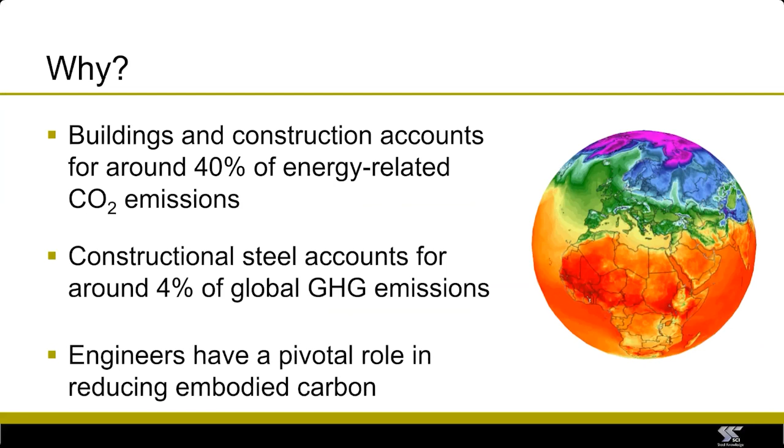Ladies and gentlemen, my name is David Brown, and I'm speaking to you about the critical responsibility that structural engineers and designers have to minimize embodied carbon. And the reason for that responsibility is blindingly clear. Construction accounts for a significant part of our greenhouse gas emissions, and within construction, clearly steel and concrete are both important. Therefore, as designers, we have a responsibility towards the planet and towards future generations.

I'm sure most people will be aware of the target to limit the rise in global temperatures to 1.5 degrees C. Well, it's already anticipated that that target will be exceeded. So the challenge is not to stay below 1.5 degrees C, but actually to minimize the overshoot. And we do that by decarbonising.

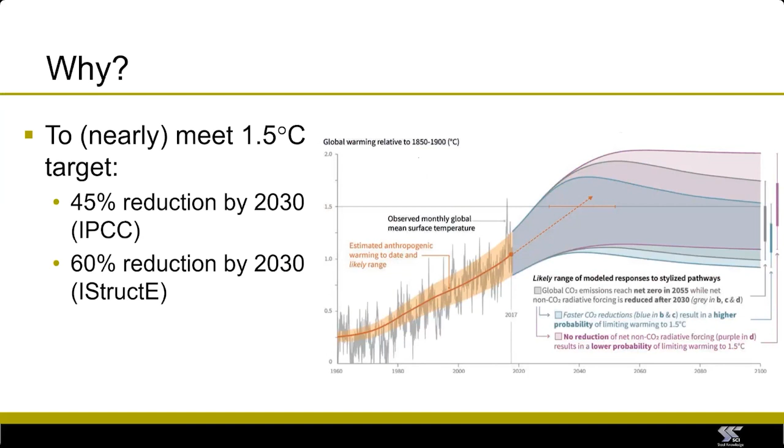So in all aspects of life, we're being asked to decarbonize. In construction, we might think about the embodied carbon and the operational carbon. Over the years, the total has reduced, but the proportion allocated to embodied carbon or embodied energy is increasing, because we've done things about the operational energy. We've got better levels of insulation, more efficient heating, and we're concerned more about air tightness. So even though the whole life situation has reduced, the proportion allocated to embodied energy and embodied carbon becomes a more significant contribution, and that's why it's the target to reduce embodied carbon.

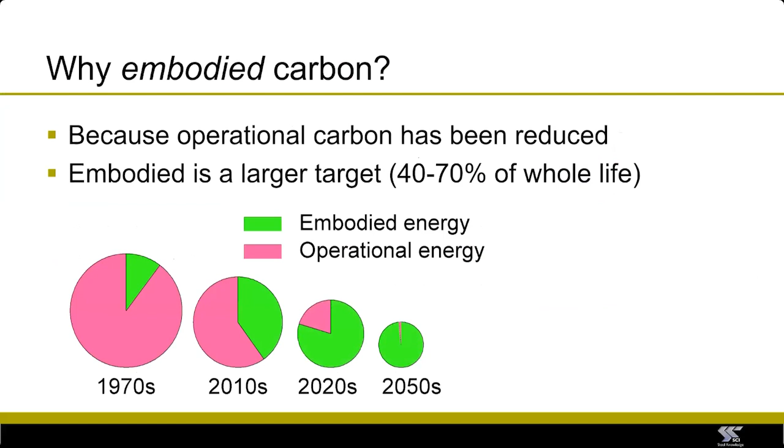So, like very many industries, the steelwork industry has a roadmap to decarbonize. In this case, it's to decarbonize by 2050. Many of these steps are the responsibility of the steel manufacturers. So recently we will have heard news from British Steel and from Tata about their plans to change their furnaces into electric arc furnaces, which run on scrap, and that has lower embodied carbon.

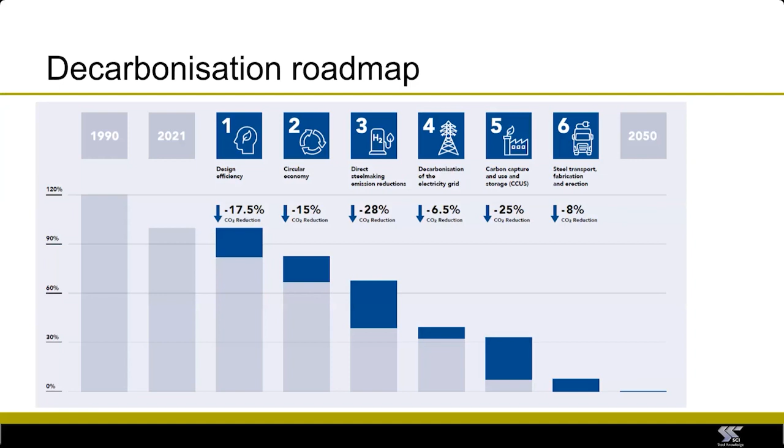So many designers, of course, are tempted to specify steel from the electric arc furnace route. That has the advantage of making your particular project look good, but it hasn't solved the global problem, because the global demand for steel outstrips the volume which can be produced by the electric arc furnace by a factor of 2. So although your project might look good, it's simply shifted the problem to somewhere else in the globe. What we really must do is just use less steel in our case.

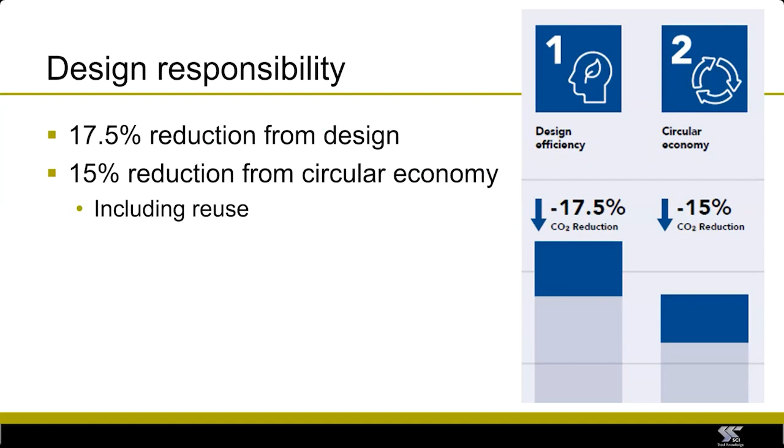So there are a number of steps which are allocated to the designer and the specifier, and here they are. I think there are significant opportunities to reduce embodied carbon by design. These are not particularly difficult, they're not particularly new, but they can have a very significant impact. And it's those things that I'm going to talk about in the rest of this presentation.

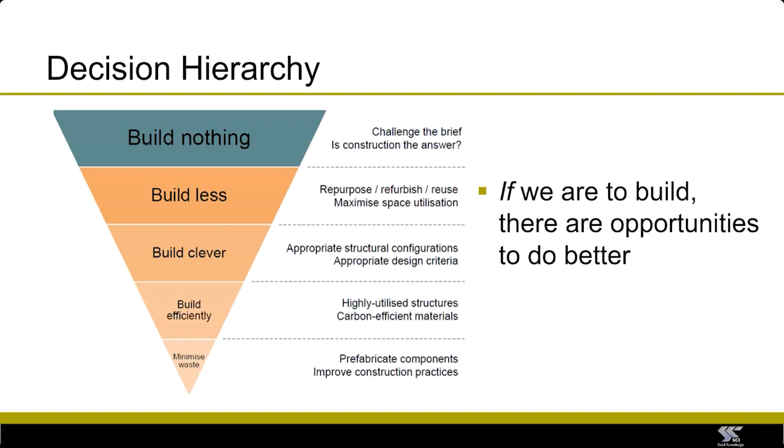If we've decided that we do have to construct something, then there are a number of questions to be answered. And as we go down this triangle, the opportunity to reduce carbon is rather minimized, so the ones towards the top should be our priority. I think in all of these areas, designers must have a response. It's no longer something that we can just simply pay lip service to. We must be able to address these challenges and explain why we have or why we haven't chosen a solution with minimal embodied carbon.

So a number of these issues then, and I'm sure you'll be familiar with many of them. The first one is we shouldn't over-specify the variable action. And the normal variable action that we deal with, particularly in multi-story buildings, would be office loading. And yet very many people will not choose the value which is specified in the UK National Annex of 2.5 kilonewtons a square metre, but they will actually choose 4 plus 1.

4, which represents crowd loading, and 1, which is an allocation for movable partitions. And the reason for that might be that they are allowing for future change of use. But that means that they are allowing for an unpredictable future, an uncertain future, which of course may not happen. And that means that somebody's paying for that allocation in capital cost, but they're also paying for it in an environmental cost. And we need to be sure that we really do need 5 kilonewtons a square metre.

Research has shown that over half of designers choose a higher load than the load which is required according to the United Kingdom National Annex. Of course, if you do reduce 5 kilonewtons a square metre to 2.5 kilonewtons per square metre, that has an effect on the eventual design loads. It reduces them by about 30%. So that's really significant, and that will be throughout the building, and that will find its way into the foundations.

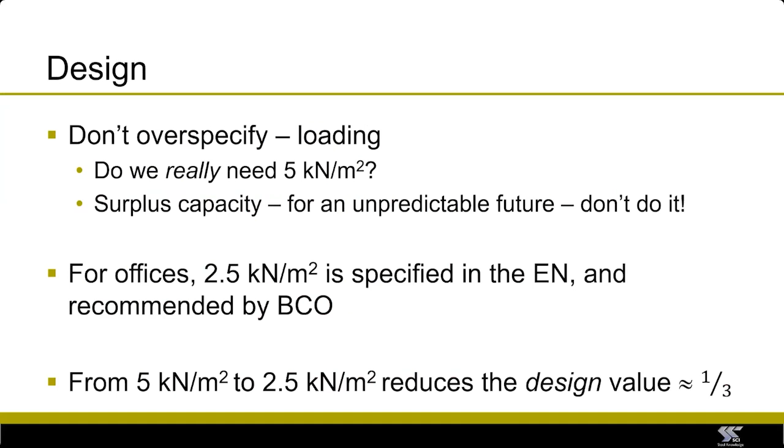When we're thinking about loading, we should use the reduction factors. There is one reduction factor for area. There is a second reduction factor, which is really very useful, and that reduces the axial load in lower columns. It's really significant - if there are more than 10 stories, the reduction factor is 50%. So the axial load in the lower lengths of columns is only half what it would otherwise be. That means we can choose smaller columns, less weight, more lettable floor area, less carbon. That must be an advantage, and we would be derelict if we didn't pay attention to these reduction factors.

Second thing about loading is that in the United Kingdom, we have the option of calculating the loads in accordance with expression 6.10, or the more onerous of 6.10a and 6.10b. We should always be using that second option. It's not really any more work at all. Expression 6.10b is pretty much always the more onerous of the two, so we kind of know it's already going to be that one. You might say it only saves a little bit, maybe about 3%, but every little saving leads to an overall saving, and this again would be throughout the entire structure.

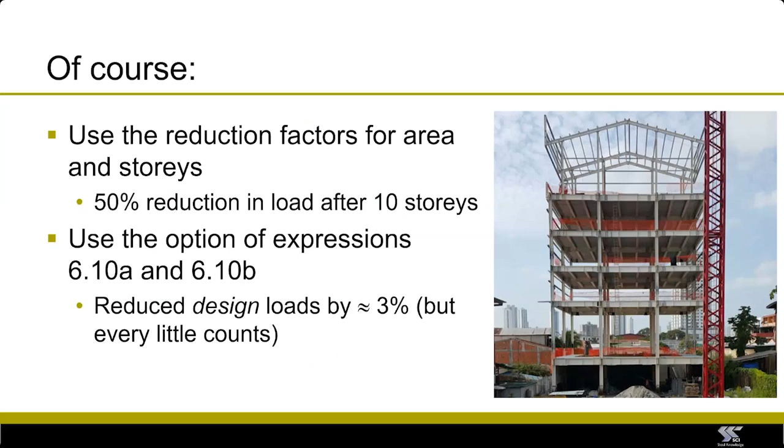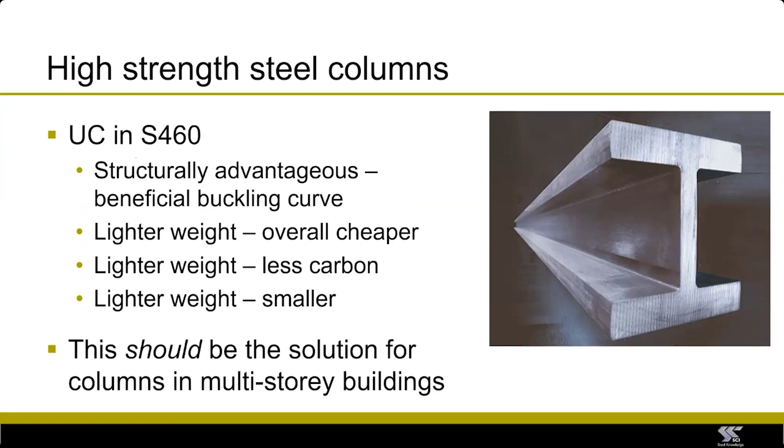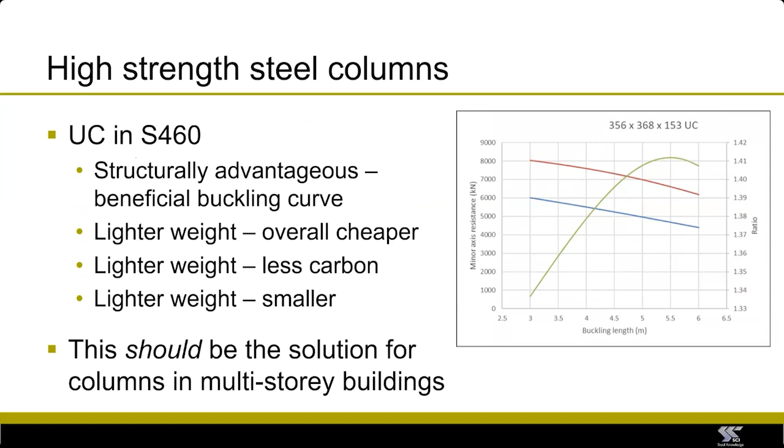When we're thinking about columns, S460 steel should be our chosen steel grade. S460 steel in universal column sections is readily available. It has a number of advantages, and it's not just the strength - they are stronger, of course, but there is also an advantageous buckling curve. So the improvement in resistance is not just the ratio between S460 and, for example, S355, but there is also a more advantageous buckling curve. So again, lighter weights, smaller columns, more lettable floor area, and less carbon. S460 for universal column sections in multi-story buildings really should be our preferred choice.

And then how hard do we work the individual members within the structure? There is some well-known research that says utilizations, that measure of how hard a member is working, are low and can be very low. Perhaps there are some reasons for that, but I personally believe those reasons are not very compelling. Even worse, there are some people who limit the utilizations to 80%, and they do that because they say between our initial design and the final design things will change, so they make an allowance for that.

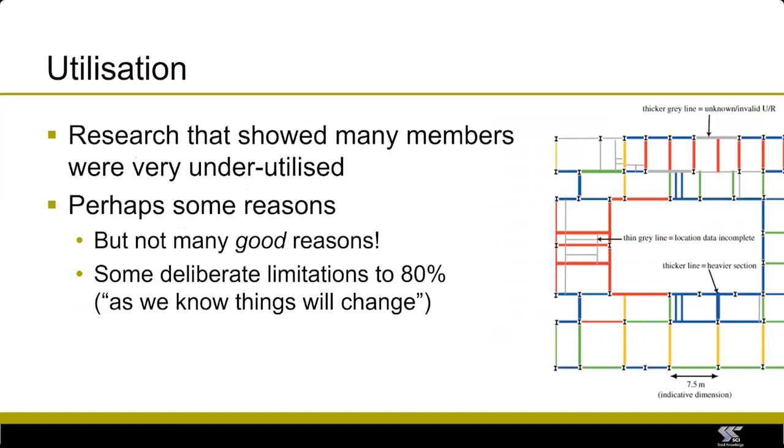The problem with change, they say, is that there simply isn't enough time and there isn't enough money to be able to finesse the design. I suggest that the answer to that is that the client must be made aware of their responsibilities towards the planet and towards future generations. There must be an allocation of time, and an allocation of cost, to make sure that we can deliver a design with finesse.

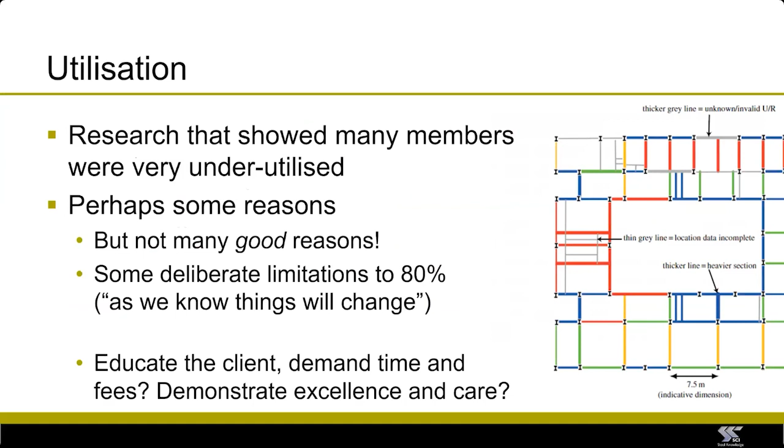We really ought to be working our sections up to 99.9% of their resistance. That doesn't mean that our reliability or levels of safety have been eroded - we already have the partial factors. If we only have a utilization of 0.8, or in many cases even lower, we are simply being overly conservative.

So some other reasons to over-design. Well, first of all, to make construction easier, and there is value in that - we don't want to provide minimum weight solutions that need expensive reinforcement at the connections. But most of the things that we design don't need that sort of detailing, so minimum weight is a good place to start. Some people say it's done to rationalize members, but most fabrication is done by numerically controlled machinery, and that doesn't care if one member is different to the next. There is an argument about minimum weights of steel.

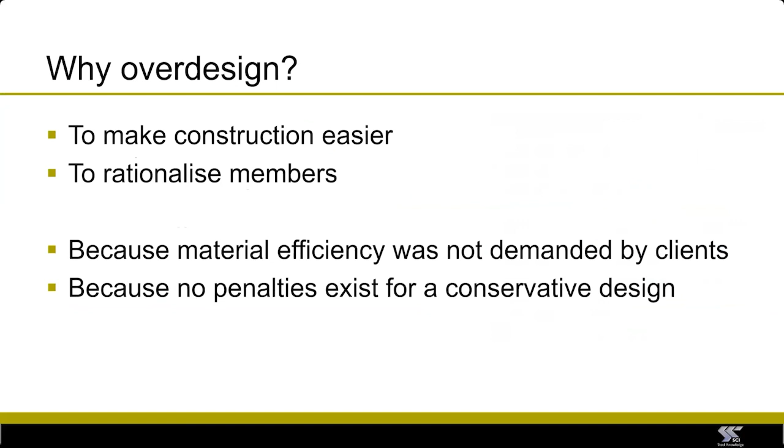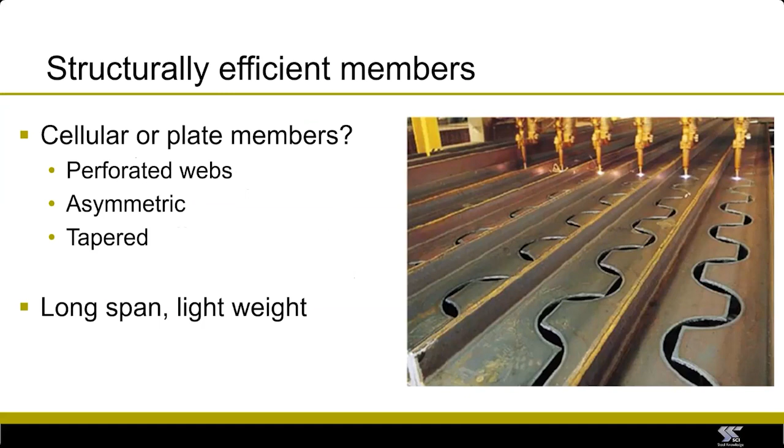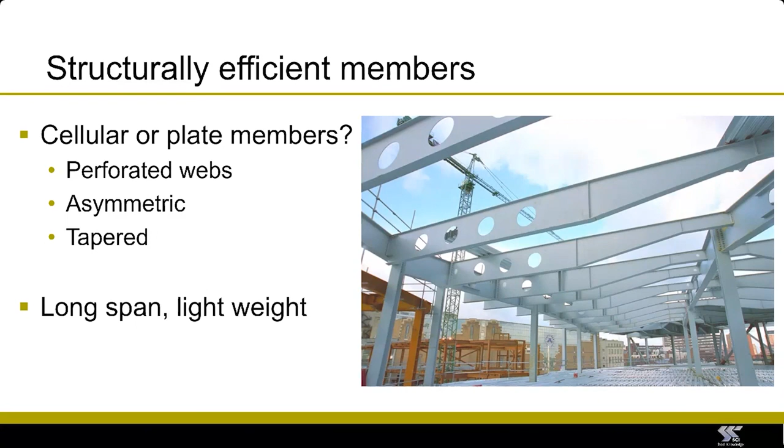If we are only specifying a very small number of certain serial sizes, that can turn out to be more expensive, but the steelwork fabricator will be able to advise on those issues. The key thing is that there's no penalty for the designer if they over-design. But that might change as clients become more educated, or as targets become embedded in legislation. So why don't we make our members as structurally efficient as possible, putting resistance where it's needed? That gives us the opportunity to deliver long spans, which are flexible and adaptable, as demanded by clients. It doesn't mean we're throwing away material, because in these fabricated members, the excess material has value. It's sold as scrap, so valuable that even the swarf from drilled holes is recovered and recycled.

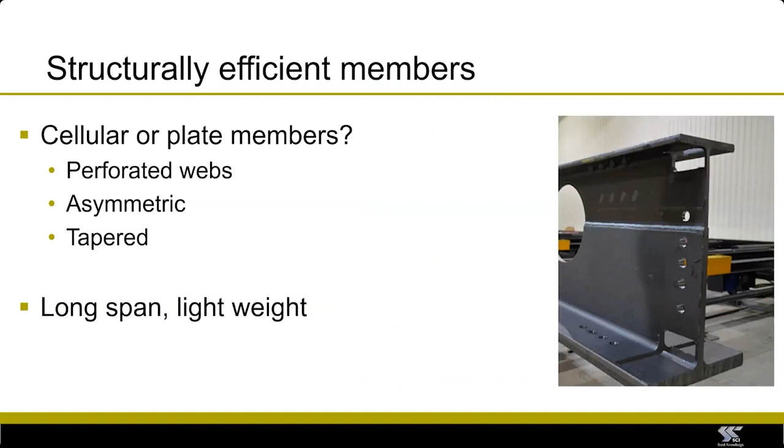Then we have methods of design. Most of the time in the UK we assume things are simply supported, dealing with lateral loads through bracing. We design beams as pin-ended members, yet we know in reality it can't be like that. Even nominally pinned connections have some resistance and some stiffness. If we use connections carefully, we can take the benefit of that resistance and stiffness, so we can do semi-continuous design, or semi-continuous elastic design. A couple of warnings: we need to be careful, as it might involve iteration, and we need to be confident we've got the correct connection stiffness. But there are tools which allow us to introduce springs into frame analysis, and tools to calculate the stiffness of connections.

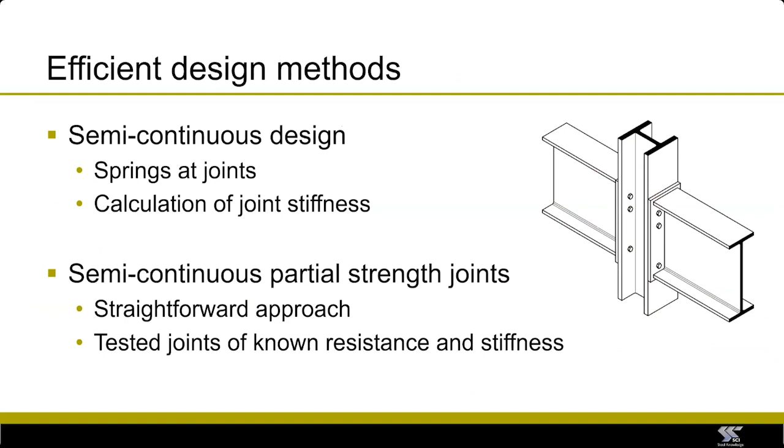So that's all possible, but one very attractive solution is to construct using partial strength semi-rigid connections. People might know those as wind moment connections, but the beauty is that they've been physically tested, so we know their resistance and stiffness. That's a really straightforward approach - you'll find it in one of the SCI guides. All we're doing is lifting the bending moment diagram, but not too much, so we're not troubling the column with excess bending moment. That means we can choose a smaller member generally, and we might worry about deflection, but we can use the stiffness of the connections to reduce it. So a simple, straightforward approach delivering savings in weight and carbon, and if we're in a braced frame - as many of us are - a really recommended approach to consider.

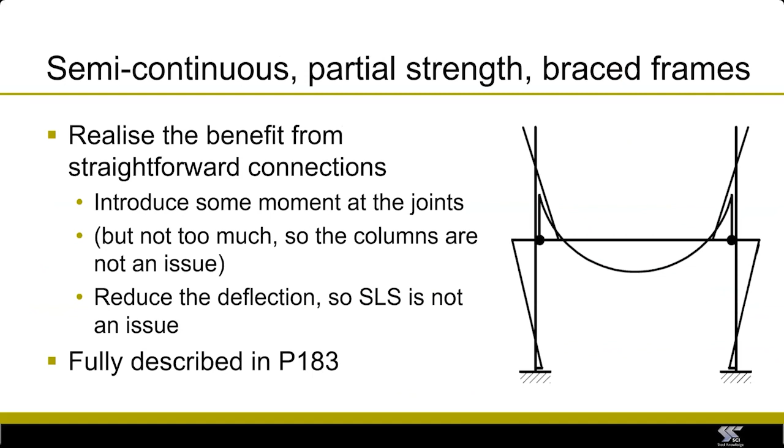One of our de facto solutions in the United Kingdom is composite construction. There's a concern that for some it might have become too de facto, too straightforward, so instead of designing each situation, people have a solution they know works. It worked last time, so they use it again. They perhaps have a standard slab depth, a standard deck, a certain mesh and a certain concrete, and don't consider what opportunities there are in the next project they design.

Well, we should be considering double span decking - that will improve the situation. If there are no other constraints like vibration or acoustics, we ought to choose trapezoidal decking, which has a significant saving with less concrete. We ought to be using propping, and people may say that gets in the way, but that's something we may have to accommodate if we want a design with minimal embodied carbon. Instead of starting at a 150 mil deep slab, perhaps we should start at 130 mil and see if we can get that to work.

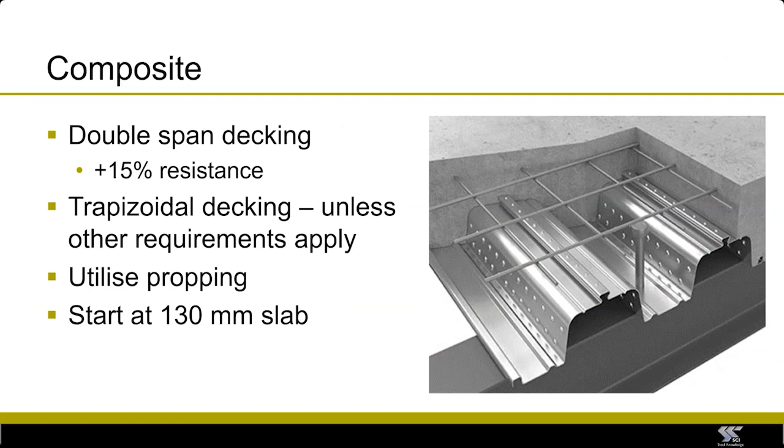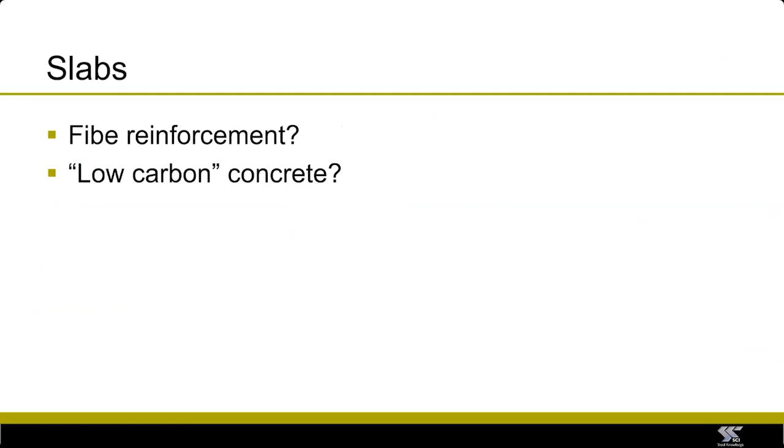So all these things we can bring together into our de facto solution. And then for the floor slab itself, instead of concrete, perhaps we could use fiber reinforcement, or low carbon concrete, or maybe something even more exciting - substitute cross-laminated timber for the floor slab. That's relatively new in the UK and perhaps not widely used, but a 140mm slab is quite equivalent to what we'd use a composite slab for.

They have a really significant benefit in terms of embodied carbon, and we should start to think about using these sorts of solutions. They are of significant benefit to us.

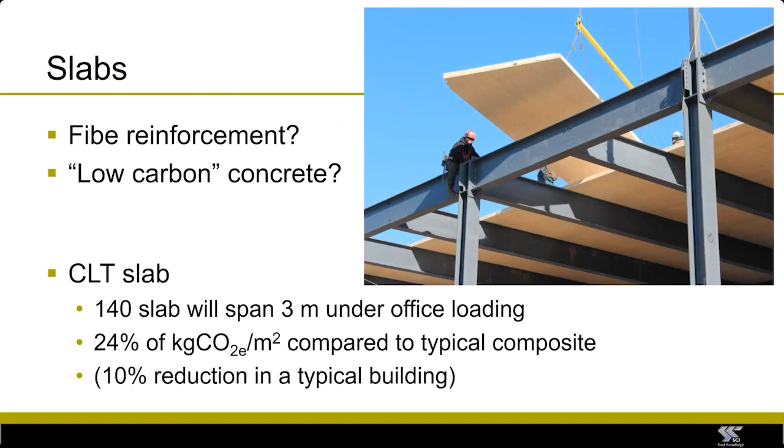Finally in this section, a comment about fire resistance and specification of protection. To do a good job, one needs to know the utilization of the members, and the ratio of the permanent action to the variable action. My experience is that this information is not provided to the people specifying the coating, so their only option is to make conservative assumptions, meaning generally an excessive thickness of coating, costing more, taking more time, using more carbon. If we provided appropriate levels of information, a more cost-effective and carbon-effective solution could be delivered.

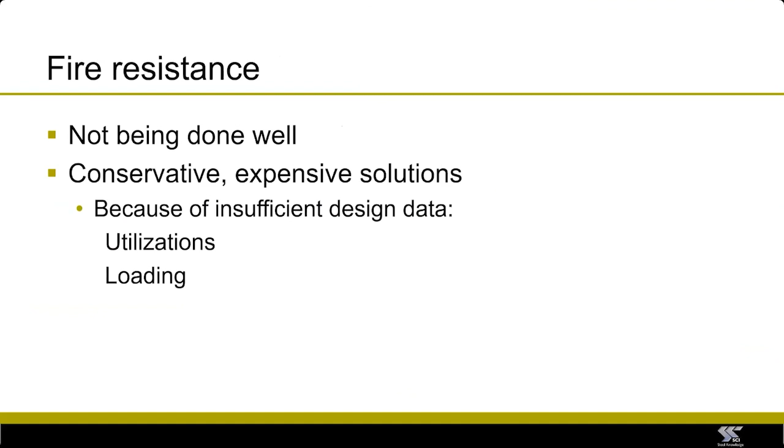These are things we should do in design, but we should also be thinking about the future, because I'm going to talk about reuse of structures built in previous decades. That will surely happen in future decades, and there are things we should be doing to facilitate that occurring in the future. One problem with reuse is that often we don't know enough about the steelwork.

Well, there's no excuse for that. That ought to be embedded with the structure, maybe in the building information model. So perhaps material passports, which tell us that information, will be valuable. They certainly ought to be thought about.

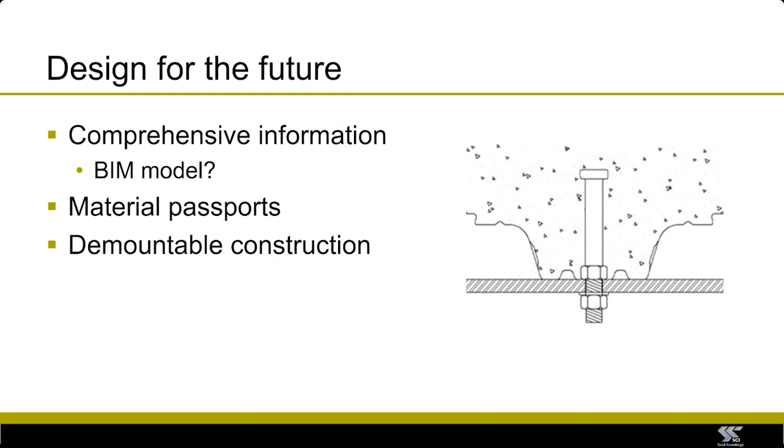And we ought to be thinking about how we make things demountable. What makes it easier to deconstruct our buildings that we build today? There are methods, even for composite construction, that we should be considering. So yes, designing for today, but also thinking about when we finally come to deconstruct the buildings we are today designing. This idea of deconstruction brings us on to reuse.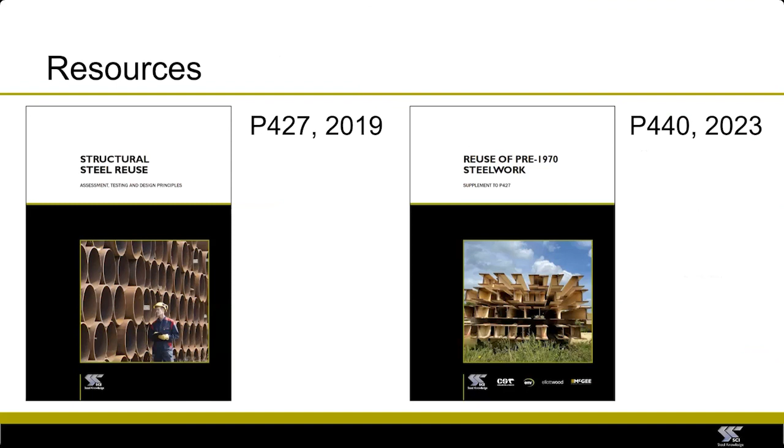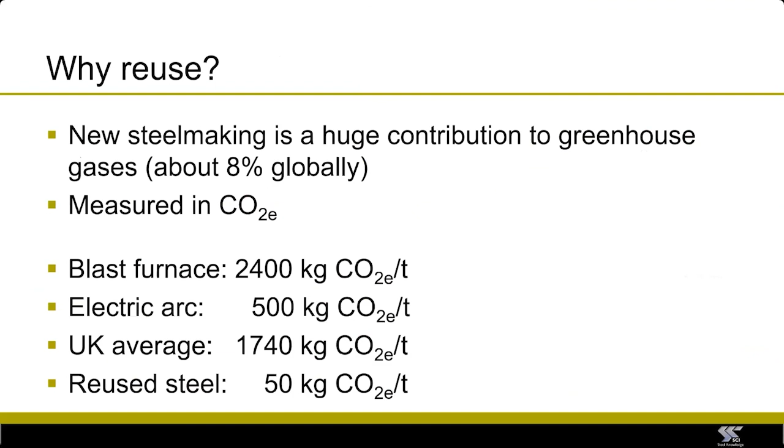Why would we be interested in reuse? It's again very straightforward. If we look at the figures on this graphic, you'll see that the embodied carbon in reused steel is so much lower than any others. It's unlikely, of course, that we can construct a building entirely out of reused steel. That seems very unlikely indeed, but at least a proportion of most buildings could use reused steel, and that will be beneficial in delivering a building with reduced embodied carbon.

One barrier would appear to be CE marking of reused steel, but CE marking is an execution issue. CE marking or UKCA marking is covered in 1090, an execution standard which talks primarily about how things are done. In fact, it allows the use of other materials from standards not cited in the standard. So we're not doing anything prohibited, but somehow we seem reluctant to embrace CE marking of reused steel. Our attitude should be that if it's not prohibited, then of course it's allowed.

I think this is a temporary problem because there is a CEN technical specification being prepared, and that will of course encourage the CE or UKCA marking of reused steel.

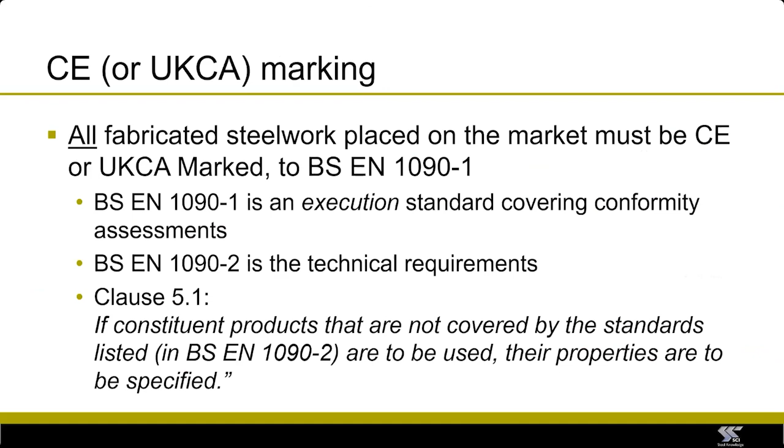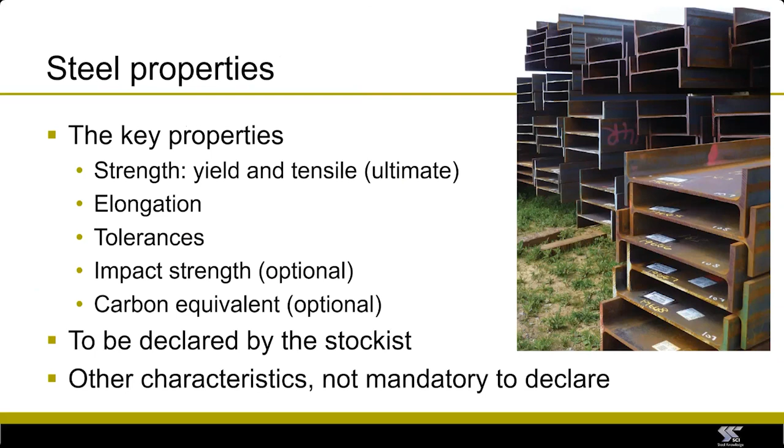If we're going to use any steel, we need to know its properties. For reused steel, there's a whole range of material properties we need to know, and the stockist of reused steel is going to determine these properties, some by non-destructive testing and some by destructive testing. The things we would expect to find include strength, and in some cases the impact toughness, the Charpy value, and the carbon equivalent. Those are the things the steelwork stockist will declare, and from then on the steelwork can be CE marked in the normal way.

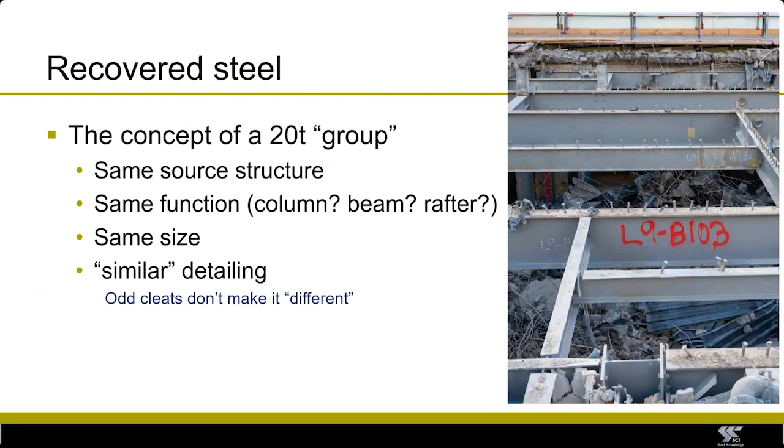P427 introduces the concept of a group. This group is going to be tested. A group is a 20-ton group of the same member from the same building performing the same function with similar detailing. It doesn't have to be precisely identical, but similar detailing. We're trying to establish the provenance of this, and then we're trying to establish that the steel group is all of the same group when we determine their material properties.

There will be issues with recovered steel, for sure. It's not going to be perfect. As it's been demolished, it's been cut or sheared. Probably it won't have been treated gently, and therefore there almost certainly will be damage.

People get concerned about damage, but my question will be, well, why do we care? And when do we care about damage? That really depends on the circumstance. It depends where the damage is. Is it in the high moment zone, or in the high shear zone, or somewhere in between? And what exactly is the damage? Is it damage to a flange or the web?

That does mean that the structural engineer must be involved with making these decisions and reviewing what is proposed. And again, that will take time, and those costs need to be covered by the client. But the goal is a structure with low embodied carbon.

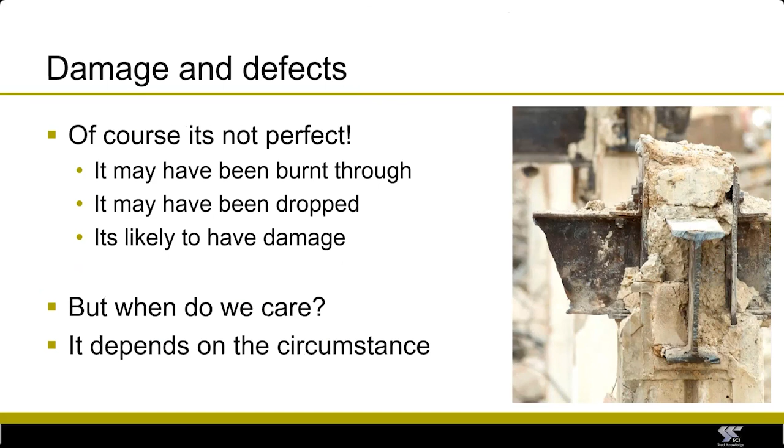Within that 20-ton group, every single piece will be non-destructively hardness tested. From the hardness tests, you can establish the yield strength and the ultimate strength, and from those two values you can decide what steel grade it is. So that's the first way of doing things: hardness test every single member to make sure that they are of the same group, establish the strength and therefore the steel grade from those hardness tests, and do one destructive test so that you can demonstrate to yourself that yes, the hardness tests are delivering the correct result.

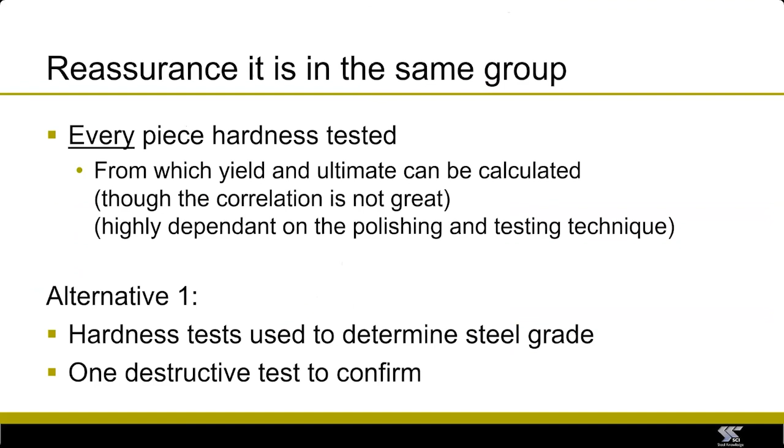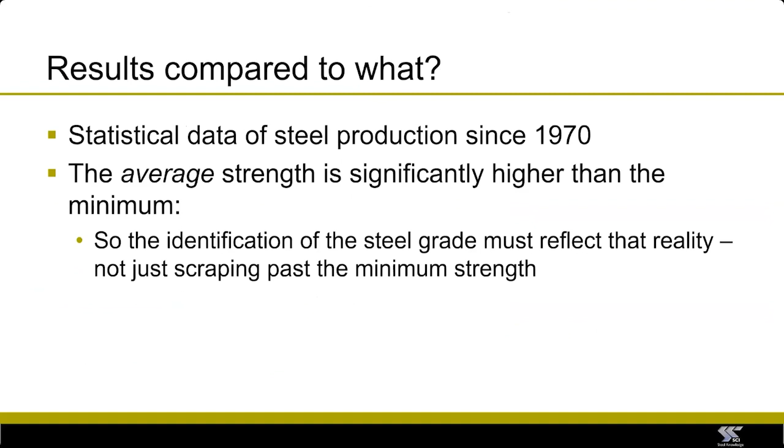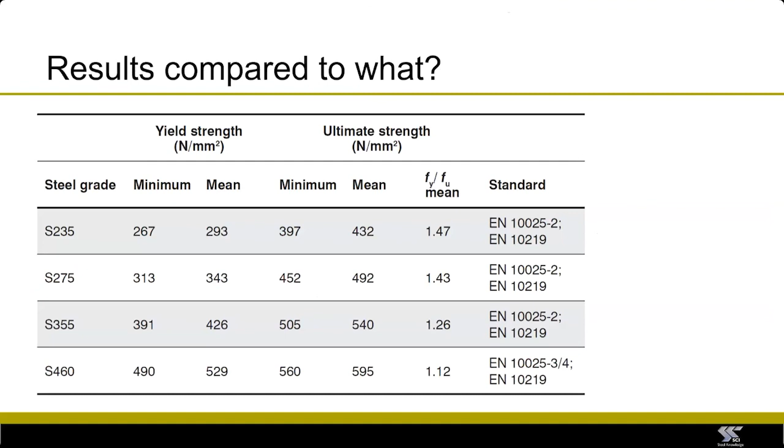We need, however, to reflect the fact that manufactured steel has a range of properties, and the average strength of steel manufactured today is significantly higher than the minimum. So when we identify the steel grade, we must reflect that. Our target value of minimum strength is significantly higher than the minimum quoted in the product standard. That's to make sure we've got the same statistical distribution as we have with modern produced steel, and therefore our reliability has not been adversely affected.

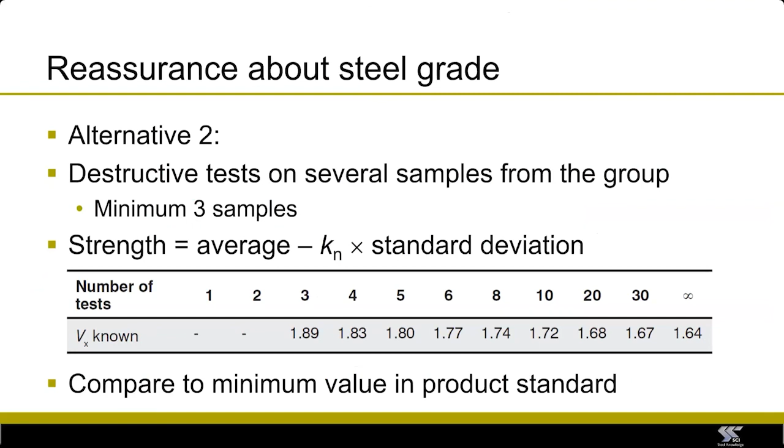The second opportunity, and this perhaps has more commercial benefits to it because it tends to produce a more realistic view of the steel grade, is to take a number of samples, complete destructive tests on each of those samples, and then simply assess the material characteristics by looking at the statistical distribution. That would all be in accordance with and adhere to the guidance in EN 1990. If we do that, we'd simply be comparing the value that we calculate with the product standard.

What's happening in practice is that determining the steel grade based on hardness alone tends to be conservative. So one might conclude that one has a weaker steel grade than actually it really is. And that's why I say there may be value in doing more destructive tests.

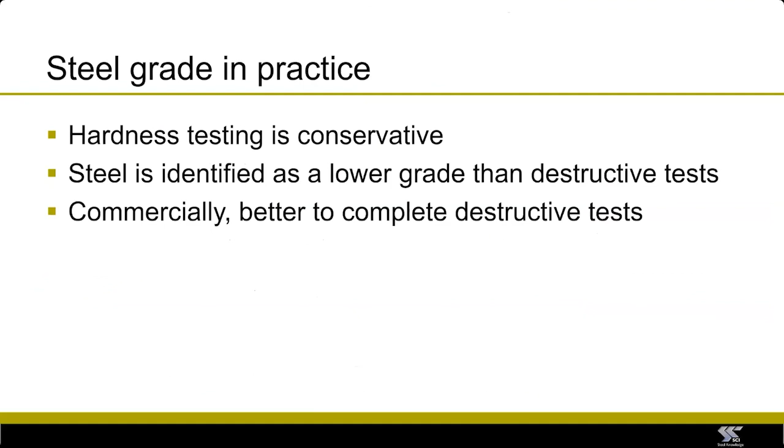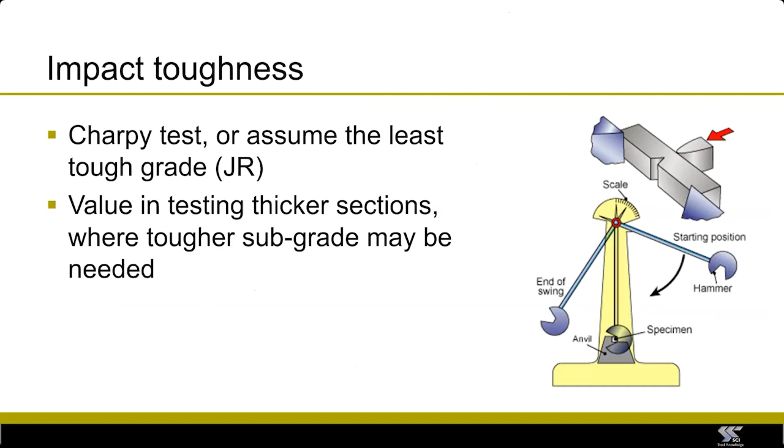It might be important to determine the impact toughness, and for that you would need to do a destructive test, a Charpy test, particularly if the elements were thick and they were going to be used externally. That might be important - a little plug for one of the other SCI guides. Remember that the Eurocode is based on fatigue, which is a very onerous situation. If fatigue is not a design consideration, then P419 has got some very helpful information, and you will find there are quite generous limiting thicknesses prescribed in P419. So have a look at that guide if you don't have fatigue in your structure. And of course, most of our multi-story buildings don't have fatigue as a design consideration.

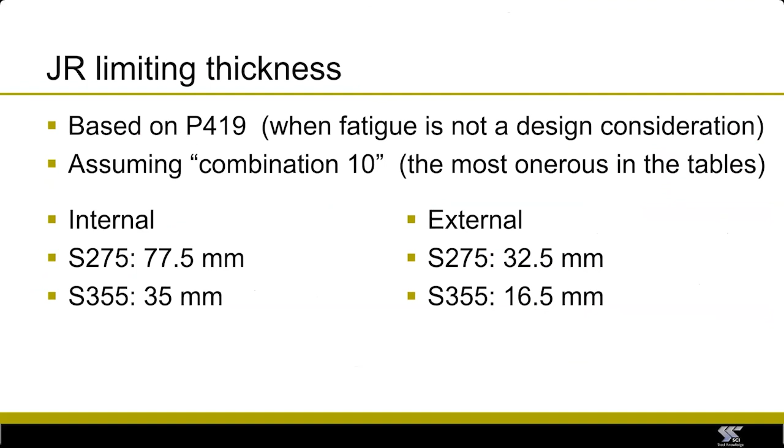We might need the carbon equivalent value, so that can be determined from a chemical analysis of the steel. That would be used by the responsible welding coordinator working for the steelwork contractor when they're developing appropriate welding procedures.

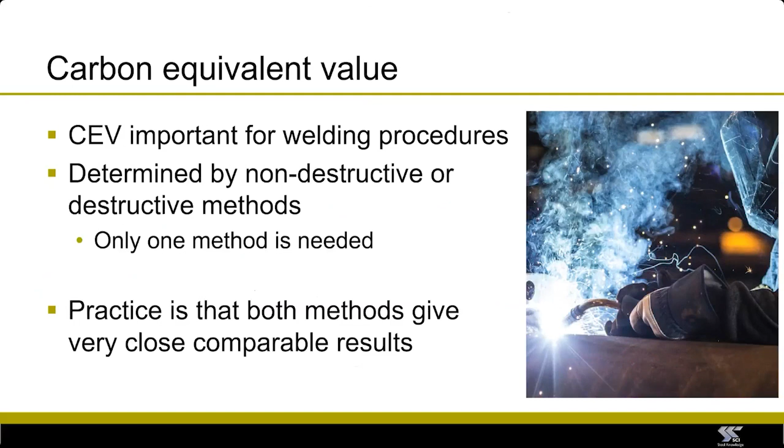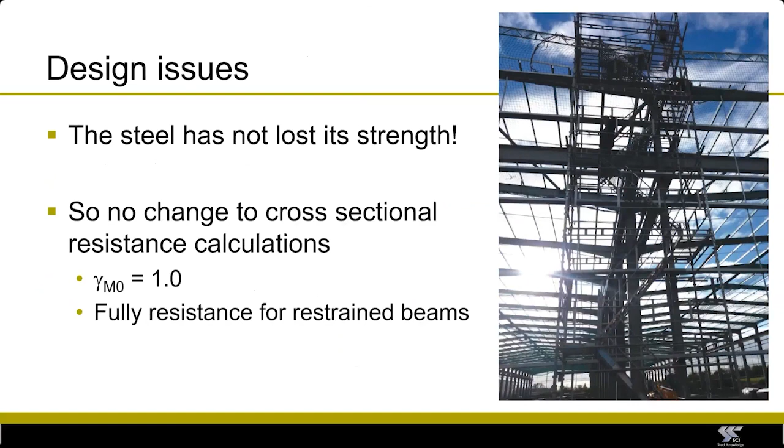Some design issues. The cross-sectional resistance - we suggest there is no need to change anything there, so gamma M naught for the cross-sectional resistance, leave at 1.0. For buckling, we're aware that there may be damage, there may be some tolerance issues, and therefore conservatively, we're going to take gamma M1 as 1.15 multiplied by the national annex value.

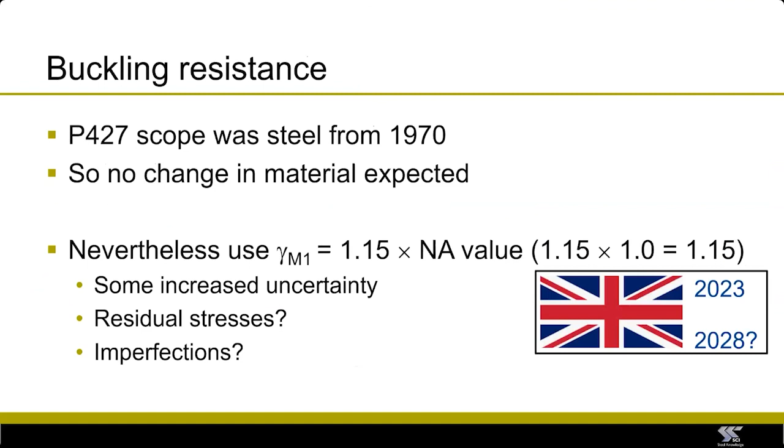To have that product there of 1.15 multiplied by the national annex value is important because, of course, in different countries they may have a different national annex value, and indeed our national annex value may change in 2028 with the second generation Eurocodes.

So that's all concerning P427, which was steel used in construction since 1970. But what about steel used pre-1970? Because much of our steel inventory is in buildings which were constructed before 1970.

Well, here are some issues, because steel certainly had some significant changes in its composition around the time of the Second World War. There were differences in practice too. In the early steel structures, there was no indication of welding whatsoever—they would have been riveted, and then later bolted. It was not for many decades before welding appeared in the design codes.

There was not a lot of concern about brittle fracture until after the Liberty ships were lost at the time of the Second World War. Design for very many years, up until about 1970, would have been to an allowable stress code, and that was BS 449.

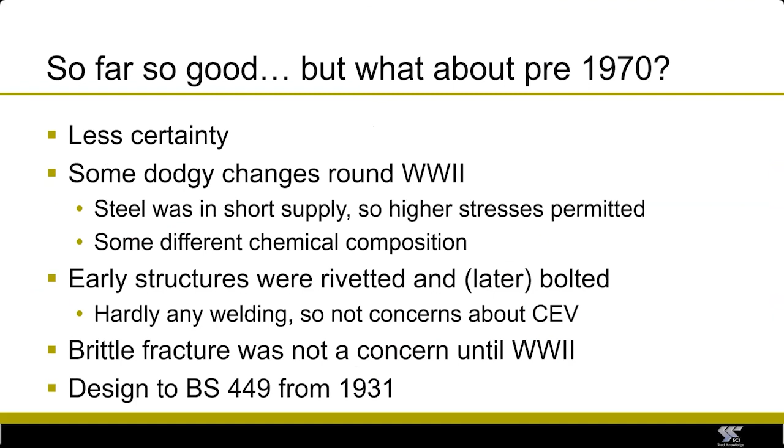So what do we do about that? Well, we created some non-dimensional buckling curves based on the lookup tables in BS 449. We were interested to find that there were several different curves over the years—a couple of those I'll show you in a moment. And then we created a brand new, slightly conservative curve that you could use with the Eurocode.

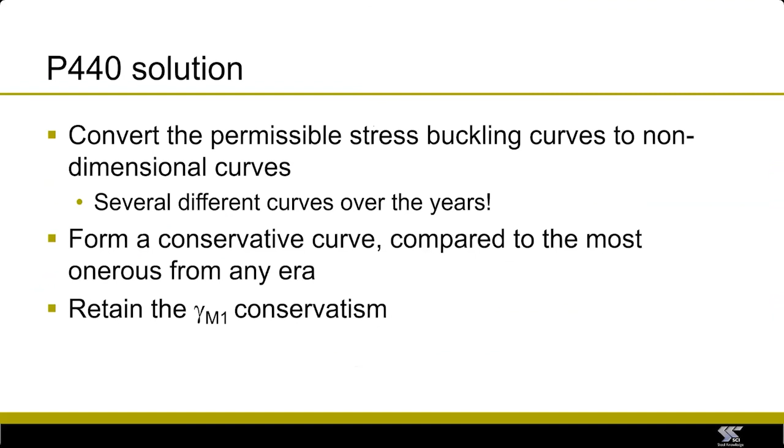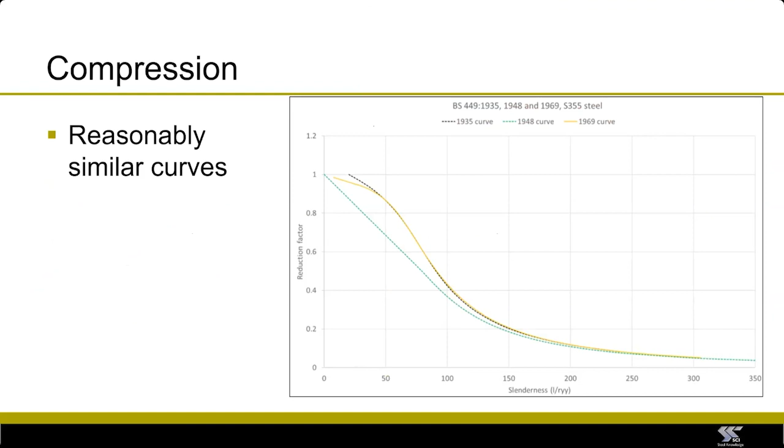So here is a slide which shows how some of the flexural buckling curves changed over the years—interesting movement. Here is a slide showing how the lateral torsional buckling curves changed over the years. The dotted purple line is the elastic critical buckling stress, and of course no resistance should be to the right of that line. So some of those curves from 1959 and 1932 are, in inverted commas, rather interesting.

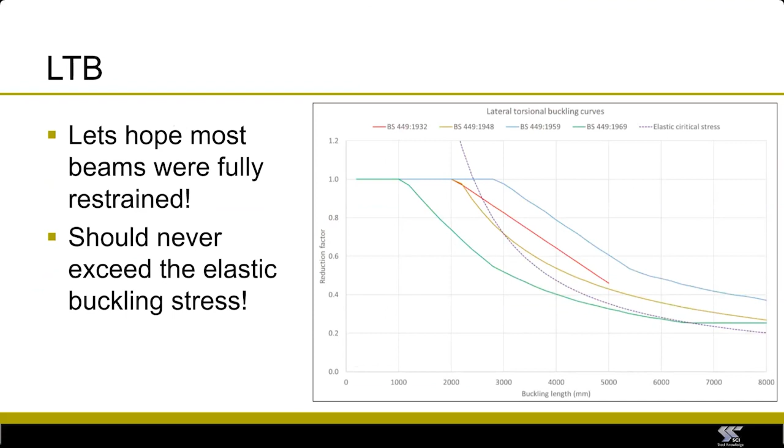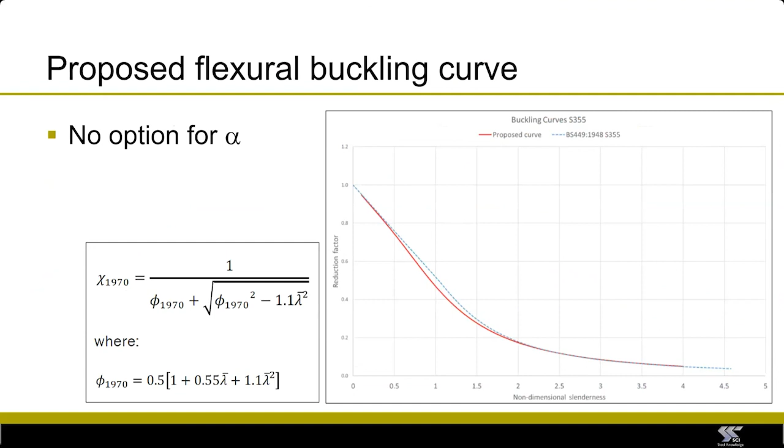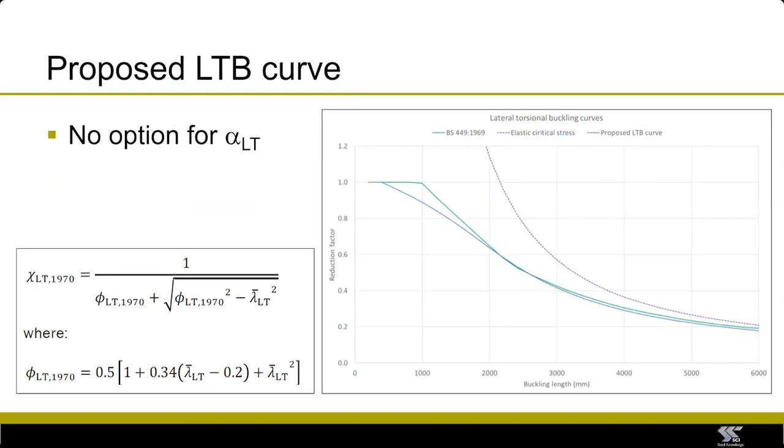So in P440, we present some very slightly conservative buckling curves compared to those we find in BS 449—one for flexural buckling, and another for lateral torsional buckling. There's limited choice with those curves; there's no choice in terms of imperfection factor, for example. They're just the curves which we recommend for use with any steel that was used in construction prior to 1970.

Let's imagine then that you need to, or wish to, reuse steel. You need a stockist, of course, to have steel, and there are several stockists now who have large stocks of readily available steel. You perhaps want to look at your design and use a stock matching tool to look at the stock available and say those pieces will be good for me. But then often there is a delay of many months between your initial design and the final fabrication, and the steel may well have moved on during that period.

So best practice is to set the steelwork contractor a target for reuse—might be, let's say, 10% of the steel in a new building. The target is that 10% is from reused steel, and allow them to identify the steel at the time they're going to buy it. That may mean the structural engineers need to give effectively envelopes and say members within these size ranges, with this sort of second moment of area, will be satisfactory for use.

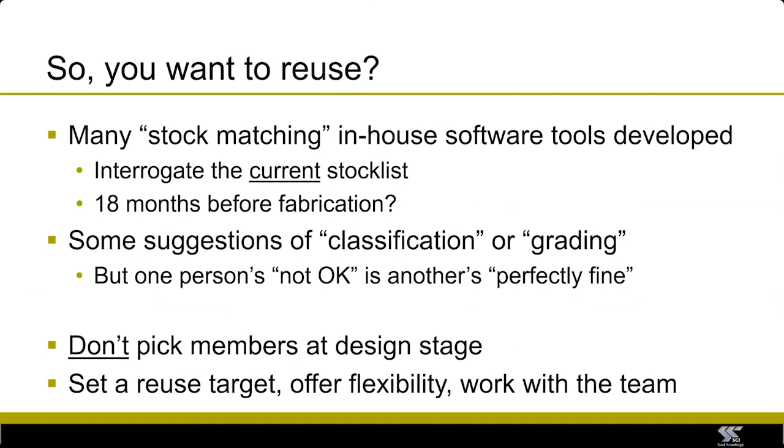And maybe that will involve reviewing what those proposed sections are, maybe with whatever damage they perhaps have, and making sure that they are okay. So again, maybe there will be additional time, additional input required, and additional costs to be covered in making sure we're producing a minimum embodied carbon solution.

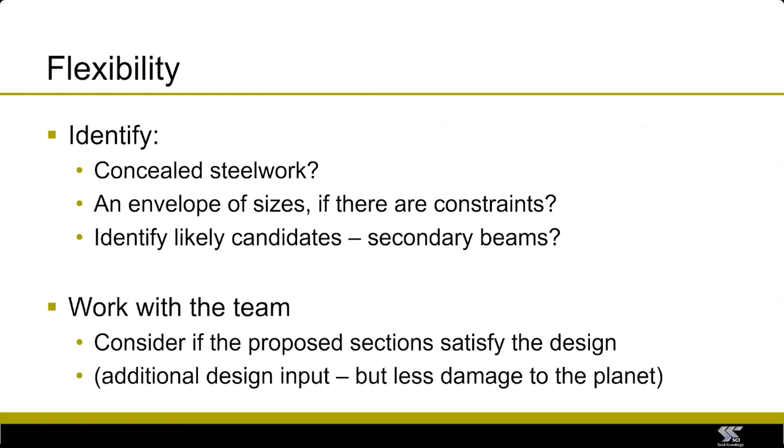So perhaps there are cases where we don't worry about it at all if we can't see the steel. Who cares really what the steel looks like, or whether it's still got cleats or any other fixings on? We don't see it, so that would be okay. But then, as I say, I think there will be additional effort in reviewing those sections which are proposed.

So, ladies and gentlemen, that's my presentation finished. Just to say that early in 2024, we should have an update of P427—that was one of the guides I described. And the first half of my presentation, which covered all the opportunities there are to produce a minimum embodied carbon solution during the design phase, should be published in spring 2024. But my overall comment is, for structural engineers, it's not just about bending moments and shear force diagrams—it's very much about decarbonising our solution.